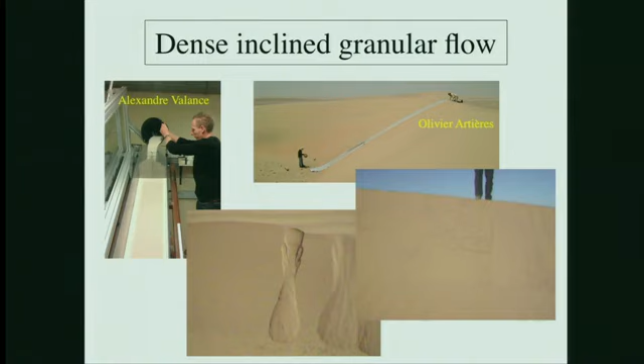So here's a typical avalanche face. This one has been created by somebody stomping, and you could see, of course, the grains going down. And here's a more spontaneous kind of avalanche that occurs on the downwind side of a dune. So there really are a number of dense granular flows that exist in nature and in industry. And one thing that I would say that perhaps will sound controversial is that in many cases we've been simplifying the problem to systems that may not necessarily be of either natural or industrial relevance. Nonetheless, a lot of progress has been made.

And in order to set up the problem, I will start simple. Many of the systems that have been looked at were of a steady and fully developed nature, fully developed meaning that they no longer depend upon x, the direction of the flow, and they no longer depend on time, which of course simplifies the equations. The convection terms in the equation, the inertia, disappear, and we're left with a simple force balance. So if one looks at the stress tensor in the direction of the flow and looks at the shear stress S and the normal stress perpendicular to the surfaces of the direction of flow, one defines a pressure, a granular pressure N.

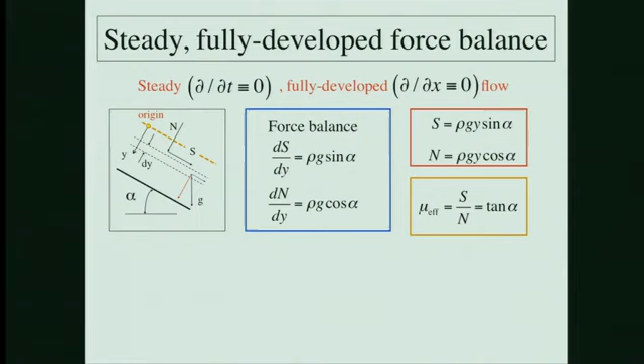In this case, this is general. It doesn't depend upon the constitutive laws. For instance, you recognize here what every scuba diver experiences when going down a swimming pool. The pressure goes up with depth. Similarly, a force balance of this kind occurs in the tangential direction. And when one integrates that equation based on the boundary condition, which is well known, which is the surface, where the shear stress and the normal stress both are zero at the free surface, then one comes up with this, which immediately indicates that the effective friction, which is the ratio of the shear to the normal stress, exerted at every level of that flow is constant and equal to the tangent of the angle of inclination, which means that experimentally we have the capability of setting up the effective friction at a given value and therefore look at how the system reacts in order to adopt that effective friction under SFD conditions, steady fully developed.

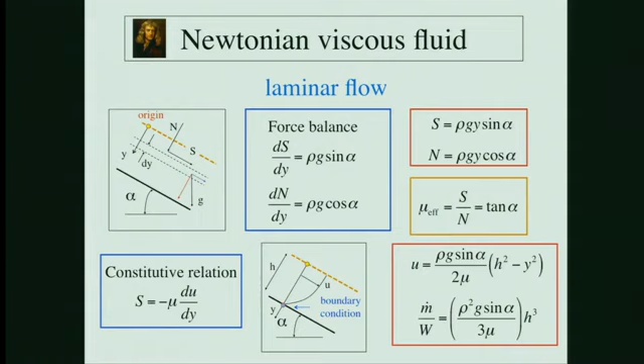So then when one puts in a constitutive law, for instance, for a Newtonian viscous fluid, this well-known constitutive relation, then one can integrate this subject to a boundary condition of a zero velocity at the base, and then arrive at a quadratic profile for velocity, and therefore integrate that again to come up with a mass flow rate that depends on the cube of the flow height. So that's a simple calculation that you could give to any undergraduate.

If you choose another constitutive law for the fluid, in this case, you imagine this is a turbulent fluid where the inertia of the fluid is paramount, then in that case, the shear stress at the base, which again has this form in general, upon integration of the equation that you saw in the previous slide, you then say that the shear velocity U star is typically 5% of the bulk velocity in the flow.

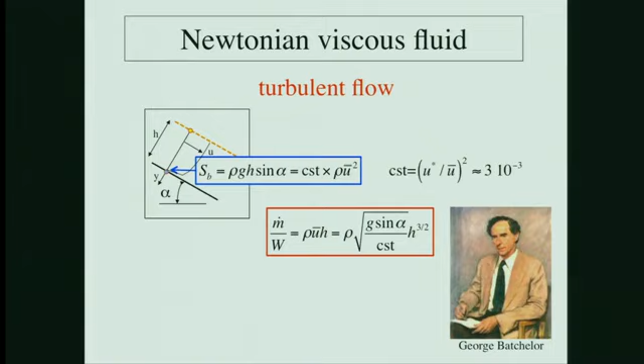Then when one comes up with this constant, one integrates the whole thing to a mass flow rate that now depends upon the 3/2 power of the height. So what about granular flows? Olivier Pouliquen, obviously here in the audience, came up with a seminal piece of work.

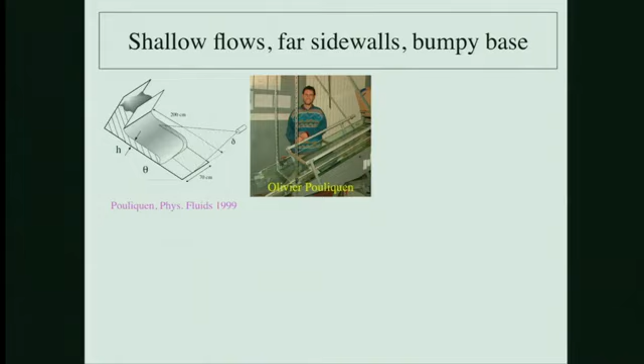In this case, he took some grains that he flowed down a chute that was prepared at the base with a rough, bumpy, as it's called, boundary, and published this very important paper in 1999. So this is a picture I took of Olivier in his lab, and I'm happy to see that he hasn't changed.

What Olivier found out was that the flow could not exist at every angle. There was a minimum angle at which the flow would start, which is around 20 degrees, say, and then there were, well, no measurements, but when the angle is too large, then the steady fully developed condition can no longer be satisfied. And some people here in the audience have worked on accelerated flows that have very different character. But what Olivier found, which was rather remarkable at the time, was that there was this function h stop that indicates that the flow cannot exist at any height at a given angle. If it's below that height, then the flow stops.

Olivier pointed out that the dimensionless number that governs the flow, that makes the mean velocity dimensionless, could be constructed with the shear stress, rather the normal stress at the base, which of course is also given in terms of the height. And then he plotted the Froude number as a function of h over h stop. That collapsed all the curves. All the angles would collapse on a single curve, which he found to be the straight line. So he found a Froude number proportional to h over h stop, which when integrated for the mass flow rate would then provide a 5/2 power of the height, in contrast with what we just saw for the other cases.

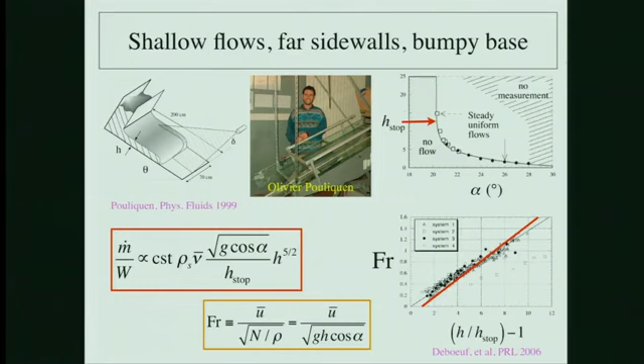Now, some people later, Deboeuf and co-workers, argued that in fact it wasn't so much h over h stop, it should have been h over h stop minus 1, but I suppose it may be in the eyes of the beholder. I would say that Olivier's data was better fitted by the other expression, but that's perfectly fine. The distinction is not perhaps all that important, although you will see in a moment in another flow where that distinction is important.

Well, so this flow over bumpy boundaries became the hallmark, if you like, a rather generic flow that everybody wanted to explain. And I think it's fair to say, although as I mentioned earlier, I have not worked in this field for a little while, I think it's fair to say there are still mysteries in that flow. But let's take a look at what Leo Silbert came up with in numerical simulations of large-scale systems in that flow, albeit with sidewalls that were pretty close.

Some people, particularly in Rennes, have since made the sidewalls farther apart and realized that there are such things as recirculating flows inside that the simulations of Leo Silbert didn't have, because the boundaries were periodic in the direction perpendicular, in the third direction, so the rolls could not arise. Nonetheless, most of the physics that was observed in experiments was also found in the simulations. So if this is a bumpy boundary, the flow existed only in the range of angles.

Crucially, what really excited people was that the volume fraction in the core, in what I call the core of the flow, which was far enough from the bottom boundary as not to be influenced by the bottom boundary, and far enough from the free surface so as to be away from the region where you basically have a very dilute gas, granular gas. In that core, the volume fraction was roughly constant to an arbitrary precision, if you like, that was determined by the simulation or perhaps the experiment.

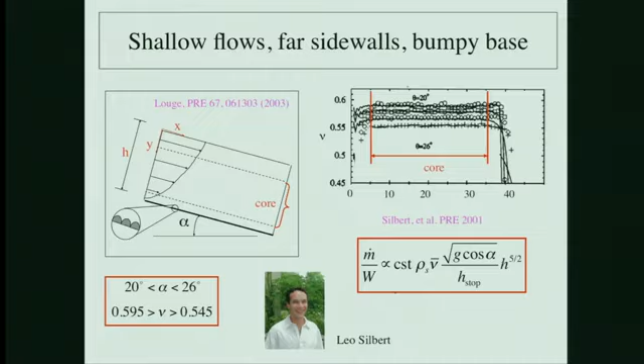So, of course, Leo Silbert confirmed that dependence of the mean velocity that Pouliquen had come up with, and again confirmed that it was as h to the 5/2 power of the mass flow rate. So a lot of people then said, well, let's try and model this. And of course, a great candidate for that modeling was to take a look at the kinetic theory of dense gases. Ogawa had years ago come up with the concept of a granular temperature, which resembles the temperature of an ordinary gas.

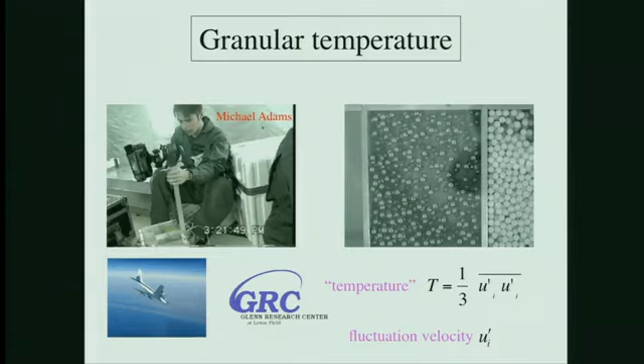So this is called a free float. And you've got a camera looking at these boxes, and these are two of the boxes we were just testing, seeing whether electrostatics would affect one of our microgravity experiments. And so this just illustrates the concept of a granular temperature.

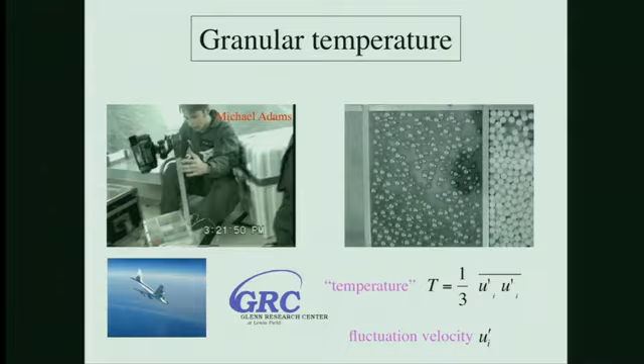So in turbulence, you would call it K, except K would basically be 3/2 of the trace of the velocity fluctuation second-order moment tensor. So it's like the temperature in an ordinary gas. And then Jim Jenkins and Stuart Savage came up with some formal calculations, through a series of papers, of the transport coefficients that the temperature endows to this fluid.

In particular, there's a viscosity, which, like an ordinary gas, depends on the square root of the temperature. There's a conductivity of this pseudo-energy, if you like. And then, unlike in an ordinary gas, there's a volumetric dissipation rate that can be calculated that goes as the 3/2 power of the temperature. Just like when you write the K-epsilon model in turbulence, you have terms in the equation of dissipation that go as K to the 3/2. They have exactly the same origin.

And then, of course, there's an equation of state, the PV equals nRT of dense gases, yet modified for the fact that these particles are much more densely packed, and therefore these functions, F1, F2, F3, F4, are dependent on the volume fraction of solids and the pair distribution function. There's also an entire field of endeavor that looks at the form of the pair distribution function as a function of volume fraction.

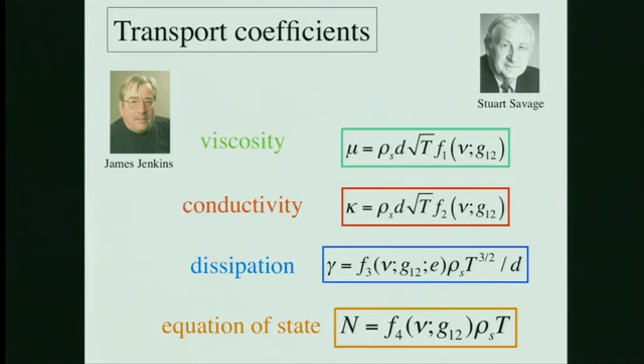And of course, as one goes closer to the glass transition, to jamming, these pair distribution functions do diverge in different ways. There's hysteresis involved. So it can become rather complicated when it's dense. It's much easier when it's dilute, although there are, of course, challenges such as anisotropies and so forth. But when one goes close to the dense packing, there are effects that are undoubtedly important in dense granular flows, and it's not altogether clear what even the pair distribution function at contact with the boundary or among the particles looks like. People like Torquato, for instance, have been very famous in trying to look at these issues.

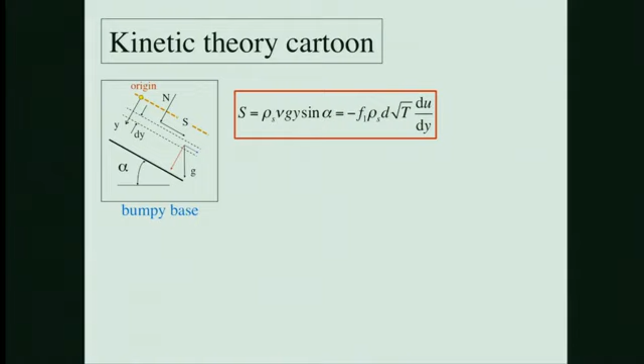Okay, so in having the transport coefficients, what I would call a kinetic theory cartoon can be put together. So it goes like this. It's a similar kind of reasoning as what I showed you earlier for a Newtonian fluid. This equation here is really independent of the constitutive law that one could adopt. In this case, the constitutive law looks like this transport coefficient that has inside this viscosity with the granular temperature in there. So one has to solve for the granular temperature in order to close the problem, similar to solving for K in turbulence in order to close the problem.

So in this particular case, it's nice in a flow like this because the normal stress is known as a result of the integration that I showed you earlier, and because it is related through the equation of state to the temperature, then one knows what the temperature is, and it roughly goes linearly from the free surface if you exclude what happens at the top boundary and at the bottom. So you can combine the two equations, and then again, if you're willing to assume that there's a no-slip condition at the base, which may or may not be true, because after all, a granular medium does not necessarily indulge you in having a no-slip velocity at the base. Sometimes it has to be calculated from the boundary conditions in ways that Jim Jenkins actually worked out.

Can I take questions during the talk? Yeah. Great, please. Why do you assume the temperature is constant throughout the flow? It's not constant. It goes roughly linearly with depth. So you wouldn't want to necessarily have a dynamics to that as well? Oh, there is. And in fact, I'll talk about that in a moment.

Thank you. Yes, of course.

So the temperature, if you like, grows as y, if you assume this cartoon. Okay? Yeah, thank you. So this integration, once you combine these two equations, leads to what people have called the Bagnold profile, in homage to Ralph Bagnold, very well known in fluid mechanics at Cambridge. Lots of Cambridge folks have had their hands on this problem.

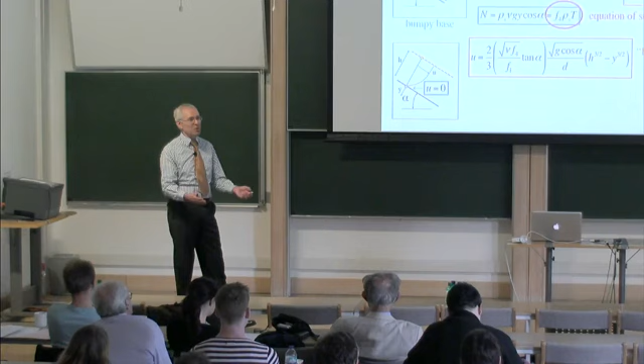It's called the Bagnold profile because Bagnold was the first to realize that one could solve a conundrum by assuming that there was a fluctuation velocity in the granular medium, and therefore the singularity at, for instance, the symmetry axis of a pipe flow could be lifted. So in his name, it's now called the Bagnold profile, although Bagnold, to my knowledge, did not work on this.

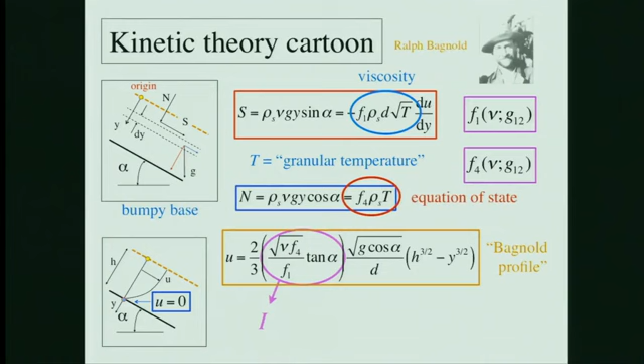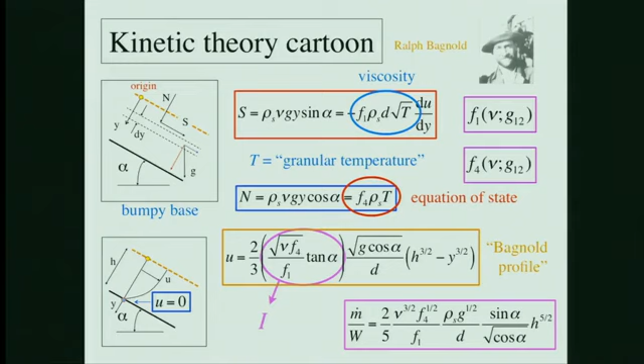One interesting combination is in a number that is called I, and I'll talk about that in the next slide, that appears naturally in the relation of the velocity to the spatial profile. Again, it can be integrated, and lo and behold, one comes up with a 5/2 power of the height.

Okay, so the inertial number that was proposed by François Chevoir, Olivier Pouliquen, and others shown here is a way to relate the effective friction, that is the ratio of shear to normal stress if the flow is steady, in terms of that inertial number, sometimes called the Savage number or the Bagnold number or the inertial number. What they proposed was something that sounded quite natural, that the effective friction would be related to this number, and it has been a very insightful and useful way for people who have flows of practical interest in industry, in particular, to come up with an answer.

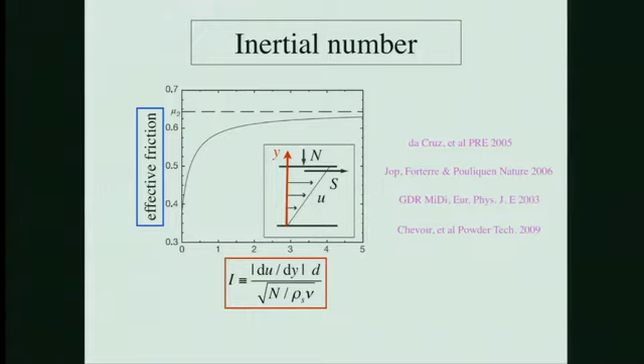It's really not that trivial to work on granular media. One cannot wait for all the theories to be closed and all the dots to be put on the i's and so forth in order to solve this.

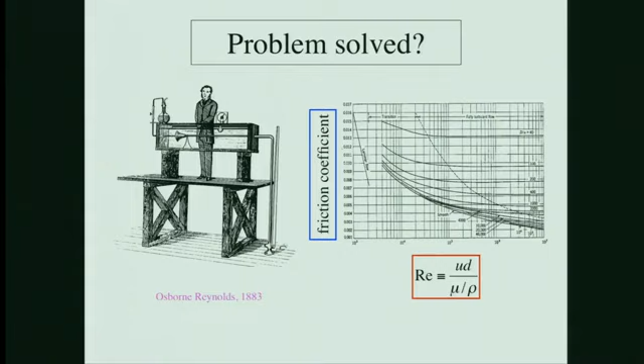Okay, so is the problem solved? And I'm happy to report that, for the sake of our employment, the problem is probably not solved. But if the problem had been solved, it would have resembled what happened after Osborne Reynolds did his famous experiments on pipes to show the transition to turbulence. At the time, people could have said, oh, everything in fluid mechanics is now solved. All we need to do is to define the Reynolds number, and here's the friction coefficient that really resembles this S over N effective friction. And we could just empirically come up with the relation for this and be done. And yes, some people, of course, use those graphs and that's how they do their calculations.

So now I would like to talk about a number of issues that I think deserve a little bit of attention. I will begin, rather simply, by pointing out that flows can have very different concavities of the velocity profile versus depth. This is something which, surprisingly to this audience, because we pretty much all know this, but I've seen practitioners use an approach which was inherently designed for flows of a concavity of a 3/2 power that I showed, use it for flows that have a completely different concavity and in fact a completely different physics. So it's important to point out.

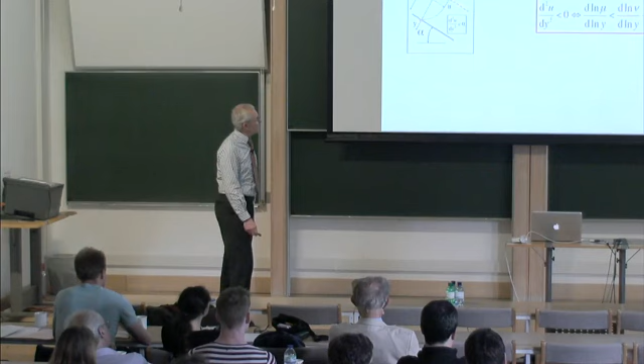So going back to a viscosity, which in the case of a granular medium is no longer a constant like it is in a Newtonian fluid, one can very simply show from this equation, which is correct in steady fluid flow no matter what, that it can be differentiated with respect to the distance from the free surface. And here's this grouping. It's really nothing to write home about, but if the concavity is negative, which is typical of the Bagnold profile, negative because y starts at the free surface, where it's most natural to start the origin of coordinates, not at the bottom, then it's a necessary and sufficient condition to have this relation among the logarithmic differential of the viscosity and the logarithmic differential of the volume fraction.

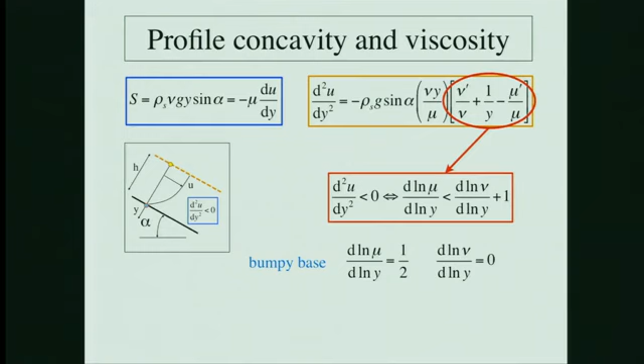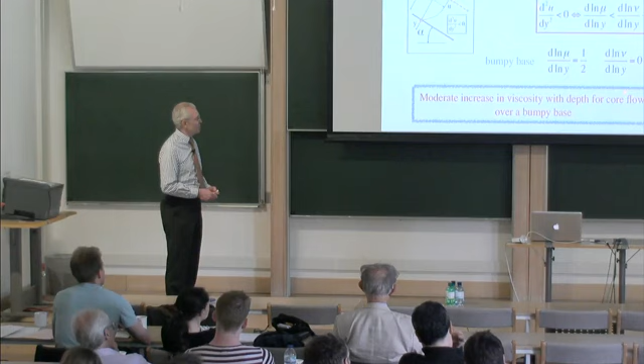So for a bumpy base, what is it? Well, the logarithmic dependence of the viscosity is exactly 1/2 in the Bagnold profile, and the volume fraction is a constant. So in a bumpy base, basically what we have is a rather moderate increase in viscosity with depth, and it is in the case of what are called so-called core flows.

So that's what is relevant for the so-called Bagnold profile. However, there are plenty of other flows, and in fact, one may argue that in geophysics, for instance, these other flows are way more important than the flows over a hard boundary. And one may also argue, and there's some experimental evidence for this, that as a flow becomes very deep over a bumpy base, then instead of having a Froude number that rises with the height, actually it becomes a constant Froude number.

There's a bit of an asymptotic effect there, in which the Froude number then becomes constant, and I'll talk about a regime where the Froude number becomes a constant. So it could be that in most flows of geophysical interest, such as dense flow avalanches and such, it is very rare to see a flow that behaves with a 3/2 power of the height. And here's an example.

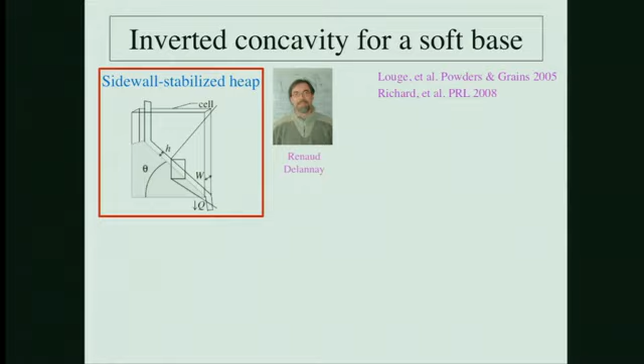Renaud Delannay and his co-workers in Rennes, many of them are here, were quite surprised to see that if you confine a flow within two sidewalls, then the sidewalls will participate in holding the flow, if you like. And as a result, one obtains, as long as it's dynamic, as long as the flow keeps going, then the flow can achieve inclinations that would not be expected, that greatly exceed the angle of repose of a heap. And they call that the superstable heap, or also known as the sidewall stabilized heap.

So this angle theta, actually I called it alpha elsewhere, but forgive me. This angle can be much greater than the angle of repose, but there are sidewalls that hold the flow. And these are simulations by Nicolas Taberlet, who's also here. And clearly the concavity of the velocity profile is very different. It's almost linear near the free surface, and then it decays asymptotically very, very slowly.

In fact, so slowly that there have been some measurements using diffusing wave spectroscopy that were capable of measuring extremely small displacements of the velocity of the grains deep in the pile. And it turns out that nobody has seen the bottom of this. In other words, there's always some micro rearrangement deep enough in the pile, and you could go on and on and on. And there's a remarkable measurement that was done in Rennes where there were, if I can remember how many, something like 6 orders of magnitude, 6 decades of velocity resolution, from the free surface all the way down, and they could not see the end. So clearly this profile does not have a zero slip, strictly speaking.

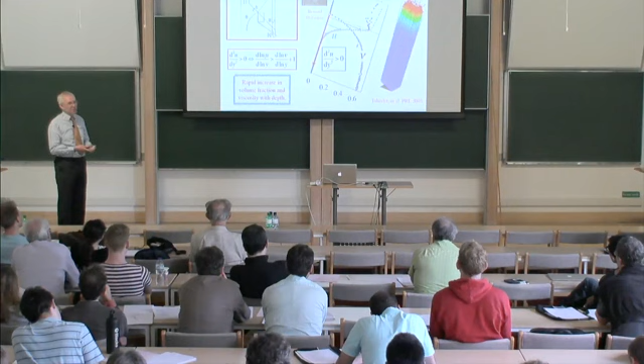And in this case, in the scheme of things, in the equation that I showed you earlier, the inequality, if you ignore the sidewalls, and forgive me for this, but I'll show you a flow in a moment that does not really have sidewalls that has the same character. But if you were to ignore the sidewalls, which of course are an important aspect of the momentum balance, you would show that that concavity means that, particularly if the volume fraction increases dramatically from the free surface, then the viscosity has to increase even more dramatically. So no longer than 1/2, but it has to be way larger than 1 in order to be consistent. So a rapid increase in the volume fraction with depth.

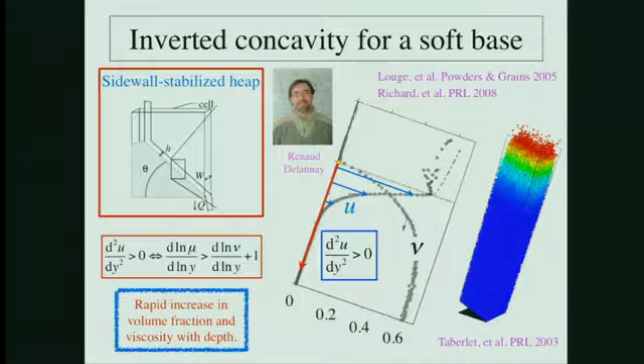So it is rather impossible, one can say, to fit a shoe that's, let's say, a size 5 into a foot of size 10. That is, none of the Bagnold-like flows that we talked about has anything to do with this, not too surprisingly. Okay, so you might say, well, what about the sidewalls? Well, the sidewalls are not necessary in order to have a concavity of that nature, and Alexandre Valance and I recently in Rennes a few months ago did a very simple experiment that was the prelude of the experiment we wanted to do in the desert with the geotextile system, where we measured strain in the avalanche of a sand dune as a function of depth and time and over several days.

And in this case, we just put the same geotextile, used a lot in the civil engineering industry. We laid it down on the base of the chute, and it sort of resembled the Daerr and Douady experiment on felt, that was done at the time, that was relevant to what happened at the avalanche face of a dune, where there's a propagation of waves either going up or going down.

But in this case, we want to have a similar system, except fully developed and steady, and where the sidewalls were no longer as important as they were in the sidewall stabilized heap. And so we just tried that, and it turns out that the sidewalls played very little role, as evidenced from measurements of the flow from the free surface. So now what you have is a base that is very soft and very dissipative of the granular temperature and the fluctuation kinetic energy.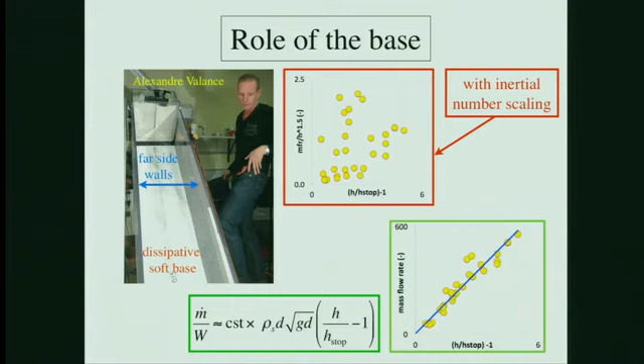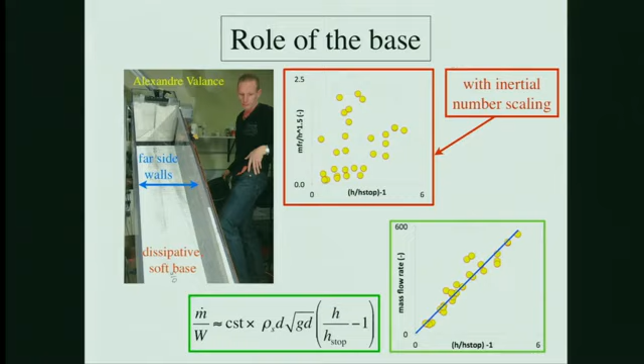All right. So if there was any need to bolster the statement that I made earlier on the irrelevance of the scaling of the mass flow rates to the height to the 3/2 power versus h over h stop minus 1, one could just look at that curve, and if you take the same data points, you can see that it works a lot better. And so in this case, the mass flow rate is proportional to the flowing height, which is h minus h stop over h stop here, directly to the 1 power, as opposed to the other exponents that we talked about earlier. And the relevant length scale being the particle diameter in this case.

Now you remember the case of the sidewall stabilized heap, the length scale that was relevant was not the diameter, but the width of the flow. And so here's some experiments that we did at Cornell on a similar sidewall stabilized heap with help from our Rennes colleagues. And so this is the tangent of the angle of inclination as a function of a height over the width ratio. This is what they found over different ratios of the width over the particle diameter, spanning a fairly large range from 4.5 to 22.

So those are collapsed reasonably well to this expression that simply tells you that the effective friction, or the tangent of the angle of inclination, is some sort of a minimum number plus the contribution of the friction from the sidewalls that holds the flow down. Of course, as the height goes up, that contribution of the sidewalls goes up and therefore is capable of having a much steeper flow. Yes, please.

Sorry. You started by describing the velocity u as a function only of distance y, which was depth from the surface. But now you put in sidewalls, does not the normal coordinate play a part? Of course, it plays an important part. Yes, this is also average. Excellent question. Thank you for asking. This is averaged over the width in this case. Yes, totally wonderful. This is basically a control volume with the entire width.

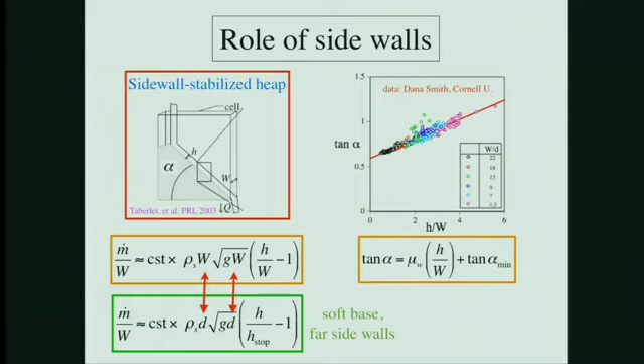Okay, so all right, but the point is that the mass flow rate now is the first power of that flowing height, as opposed to the other exponents that we talked about earlier. Okay, let's talk now about the flat frictional base. That's something that is of great industrial relevance.

I don't think I've seen any chutes that have a bumpy base in industry. They don't want to slow down their chutes. They want to make the chutes go as fast as possible. And obviously on a flat base, it's sort of intuitive it should go faster. So these are simulations by Nicolas Taberlet, again, that I showed earlier some of his other simulations. So this is a bumpy base and a flat frictional base.

This is the velocity colored. Okay, and so here's the profile on the bumpy base, the profile we talked about earlier, the Bagnolian profile. On a flat base, it is clearly much greater, as everybody in industry knows. But what's rather interesting is if you translate the velocity profile in the bumpy base, you will see that in the core, what I call the core of the flow on the flat frictional base, it is totally parallel, which means that there really is a Bagnolian profile over the flat frictional base, but it is above the boundary. And really what happens is that there's a large slip at the bottom of the flat frictional base that really is what characterizes the flow.

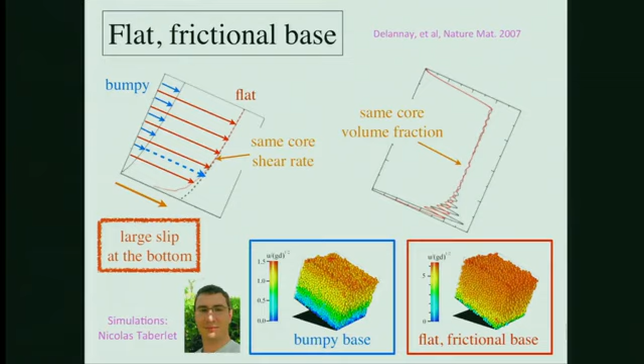And that large slip is what will determine eventually the mass flow rate, and one could even ignore the fact that there's a Bagnolian profile above while you do the integration. It is the large slip that dominates the mass flow rate and not the Bagnolian integration. Again, there is also a core, and the volume fraction Nicolas Taberlet showed is the same as the one over the bumpy base. There also is a core, and it rejoins the same volume fraction. So the flows are cousins, if you like, but one is much faster than the other.

Okay, so here's another kinetic theory cartoon on that flow in the flat frictional base. So similarly, one can calculate the granular temperature at the base. So now focus your attention on the subscript 0, which indicates that now we're looking at what happens in the basal layer, which governs the slip and which in turn governs the mass flow rate. So it adopts a certain volume fraction, nu0, and a certain temperature. The temperature, you can come up with from the same combination of equation of state and an integration down to the bottom boundary, then the same kind of calculation of the shear stress can now be related to the gradient of the velocity at the base, which now becomes, roughly speaking, if you simplify the Bagnolian profile to being a constant velocity, and you just say that the velocity gradient is over a very thin basal layer, you then have an estimate of that gradient.

And I need a little bit of water, otherwise my voice can go up. Sorry. Okay.

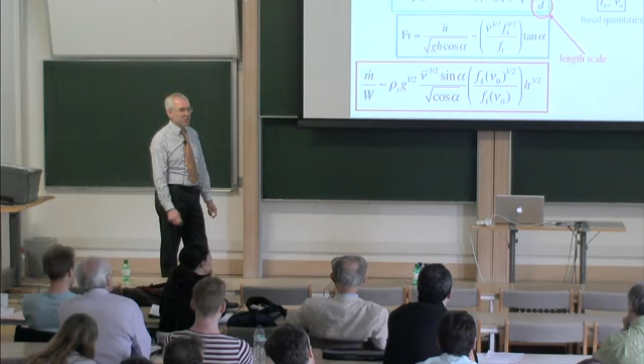Okay, the reason for this, really the ultimate reason in the basal flow like that, is that the length scale is no longer the entire depth of the flow. It is now the diameter, which is on the order of the thickness of that layer at the base. What you essentially have, whether you are in a Bagnolian flow and you have a flow that is sheared all the way to the boundary, or this, there is a region right near the base where the flow feels that the base is there, and in solid mechanics, they would call that a localization, essentially a localization of the phenomenon that is only a few grains thick, on the order of 5 to 7 grains, and that's what one observes in the basal region of a Bagnolian profile, and this localization does occur here as well.

Okay, so experiments to boost this up. These are experiments I did with Steve Keast back in the mid to late 1990s. So it tells you how long ago I've been working on this problem. I'm sure you'll straighten me out on all the things that I've missed since then.

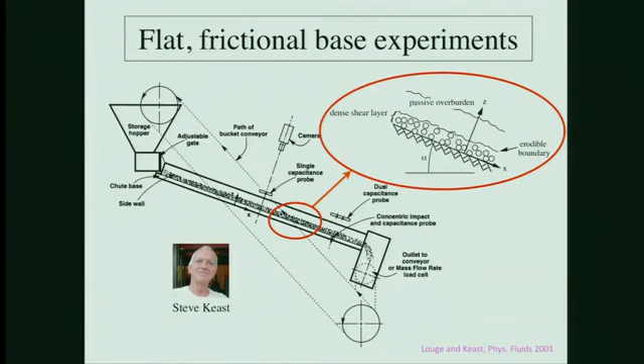So the way to model this simply is to say there's a passive overburden, which is the Bagnold profile, which becomes much less important, so I treat it as a passive overburden. This was an idea that Jim Jenkins mentioned. And some sort of a basal layer that can be modeled.

Now, Roy Jackson was one of the first people to work quite seriously on both the flat frictional and the bumpy boundaries. There's a number of papers that were written. Stuart Savage also did contribute. There's a number of authors. And what Roy Jackson pointed out is that all the flow experiments could be put in a single diagram that shows the mass flow rate in terms of the mass holdup.

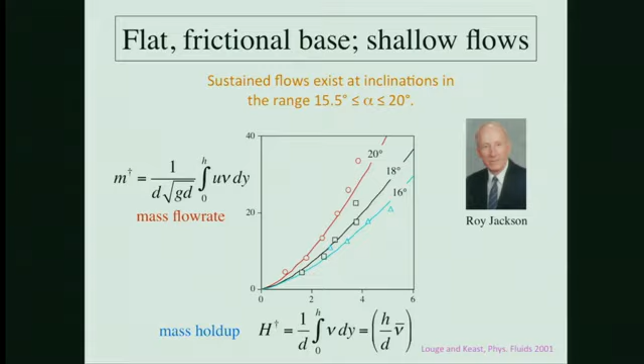So you see the mass flow rate is the integral of the velocity profile times the volume fraction, and the mass holdup goes as the integral of the volume fraction. And so the flows at different angles of inclination and at different heights, these are 16 degrees, different heights, can be represented, and it can be shown that indeed the Froude number is a constant and no longer dependent on the height. Okay, so what is the challenge in flows on a flat frictional wall? It's to predict what happens at the base, and clearly that is not being predicted.

Charlie, you had your hand up. Trying for about 5 minutes. I'm sorry, it's like waiters in a cafe. You can never get their attention.

Sorry. Okay, go ahead. Well, it just occurred to me that you keep talking about the slip layer in terms of granular temperature and kinetic theory. Isn't the simple answer that you've got a rolling layer of particles? Aha, thank you very much. Seen in simulations going back 30 years. Totally, 30 years. Oh yeah, yes. In fact, Charlie understands this very well and is perfect.

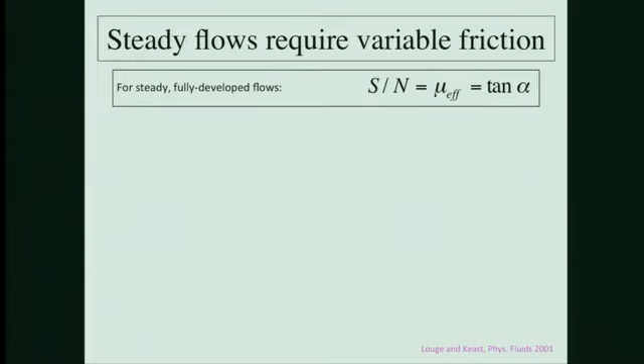That segues into what I'm talking about in this slide. So this is great. Charlie's talking about the rolling layer at the bottom. So this is what this slide is about, to get to. Yes, absolutely. Thank you very much.

So we do have, again, this tangent of alpha, which is the effective friction. And the argument here is that if you ignore the sidewalls, because all forces are exerted at the point of contact of individual grains with that flat wall, geometrically, that's an argument that's a bit incontrovertible, it's right at that point, it means that it is the dynamics of that point that matter.

And here's the conundrum that we have. We took pains at measuring the friction angle of these glass beads that were glued on a piece of metal, and we put it on the chute, and we raised the chute until the tangent of the angle of inclination exceeded that friction, and it started slipping. So that was 0.59, pretty large value.

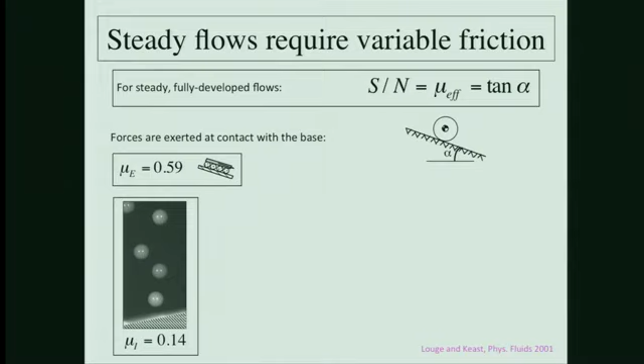And then we had a facility where we studied impact that allowed us to do some impact measurements of either particles colliding in midair or particles colliding with walls. In this case, with the very same particles on the very same surface, we measured 0.14. So two very different values of friction. And it turns out that over the range of inclinations where we observe steady fully developed flows, that range of angle was somewhere between the arctangent of these two numbers. So there was a bit of a smoking gun, if you like. Being in the US, I use that kind of analogy. In that the effective friction was adjusting itself to an angle that was exactly equal to the angle at which the chute was held.

Otis Walton, when we did numerical simulations, had actually seen that conundrum before. He did some numerical simulations and realized for quite a while that if one adopted a single friction, one had to raise that friction to values that were totally unphysical. And why is that? It's because if you have a single friction coefficient at the point of contact, then the ratio of the tangential to the normal force had to be, by Coulomb's law, less or equal to mu, meaning that by the time you integrate all the interactions of all the grains with the bottom wall, you could only have an effective angle of that integration that was less than the friction that you assumed.

So that was a bit of a conundrum. And many simulations have the same conundrum. They use a friction coefficient which is artificially too high, which is completely and thoroughly unphysical. There's no, to my knowledge, impact friction with this kind of experiment here. No simulation ever assumes this. They always assume that.

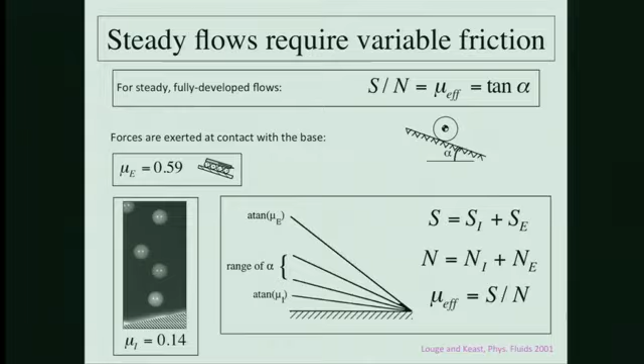Okay, so the point is that the friction probably adjusts itself to the speed, the relative speed of the contact point with the base, and that's well known. Friction is a complicated system. It's a dynamical system. Baumberger and Caroli, for instance, wrote a series of seminal articles on the subject back in the 80s. Friction is not a constant. Everybody who plays the violin knows that there's a regime of stick-slip which gives rise to sound. Steady friction is only a part of that regime. But Ken Johnson, here in Cambridge, has known that for many years.

And if one comes up with a theory that marries an enduring kind of theory a la Jackson, Roy Jackson was the first one who actually put together a tensor, added the two tensors together, one that dealt with enduring forces, more like solid mechanics, together with a tensor that looked more like the kinetic theory of dense gases. You added them up together. It was a bit controversial to do that, but why not? We adopted the same formalism. Stuart Savage also did that. And we calculated formally that the effective friction had to go down with the Froude number, which of course was a conundrum because it led to an unstable flow. There was no way, if you make your friction less if you go faster, then clearly it's conditionally unstable at every point on the curve. Okay, so we had that conundrum, but the rolling layer was the one that let us go above that conundrum.

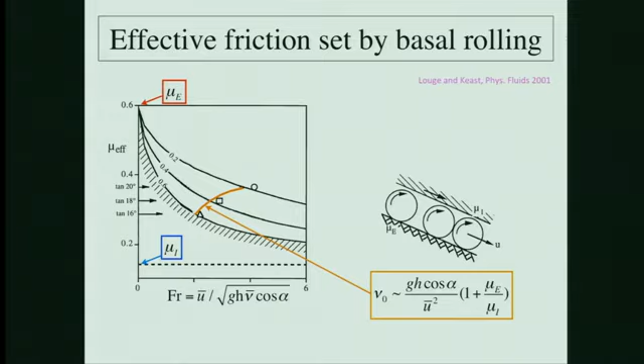Okay, so let's talk a little bit about fluctuation energy, because I think people here will straighten me out. I know there has been a lot of progress since I last looked at the problem. So you will see the depth of my ignorance.

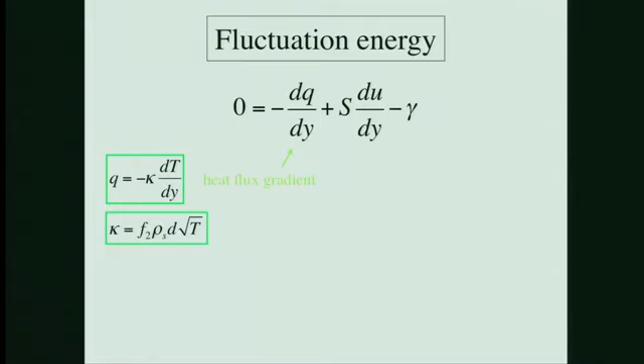But the fluctuation energy in steady fully developed flow, the balance looks like this. The first two terms are what you would see in an ordinary fluid where the Eckert number is non-zero, that is to say where the working of the shear through the stress tensor, rather through the velocity gradients, contributes to the heat transfer flux. The difference here is that we now have a dissipation per unit volume. So here's the heat flux gradient that has to do with this conductivity I talked about. Here's the flux, which looks like a Fourier flux. Here's the work rate of the shearing, and here is the dissipation.

And okay, so here, what is the conundrum? Well, the conundrum is that if you just assume that you have kinetic theory, and if you make the distance from the free surface dimensionless with the grain diameter, n goes roughly as proportional to y, so does s. The temperature also is proportional to y. The things I talked about earlier. And then if you put all the equations together from what I showed earlier, you get this monster thing that only involves these functions of volume fraction here.

And so if you take the problem in this direction, if the volume fraction is a constant in the core, and there's no term of the flux gradient, which Kumaran showed was negligible in the core because the conduction length was very small, right? Then you could say, okay, if you transform this equation to this one, but here's the conundrum. This term here is a function of the volume fraction. So if indeed the equality here, so here are the terms identified, if dq/dy is zero, then it follows that you cannot have nu equals constant because it has to depend on y, which is still in this equation.

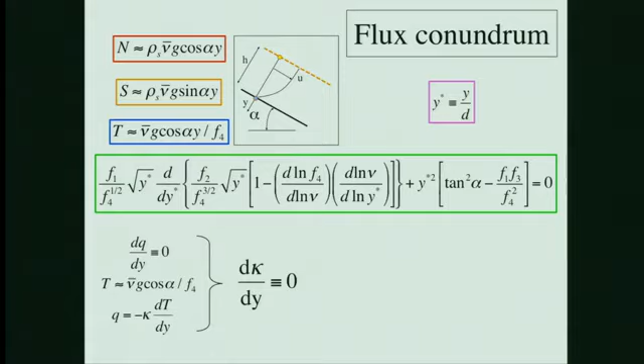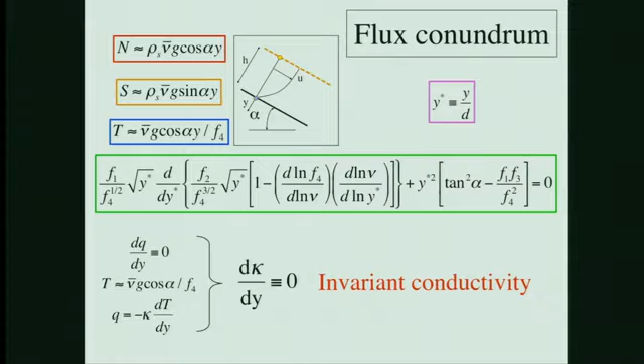So if you go back the other way, you say, oh, well, if dq/dy is 0 and T goes like this and q has to have this form, then it follows that the conductivity has to be invariant. Trouble is, it's not an invariant in the kinetic theory because it depends on the square root of T, which itself depends on the square root of y, and therefore it's not working. Okay, so the conductivity, strictly speaking, mathematically, this is a mathematical institute, right? So I could say that. Strictly speaking, the conductivity must be invariant for the kinetic theory to apply.

Okay. All right. So this was done a while ago. I know that there have been some developments that Kumaran, I'm sure, will tell us about.

But at the time, I bothered to take the myriad of papers that were written on the subject, and I've forgotten a few, Bocquet and PRL and so forth, and I dissected each and every one of them and I put it on MATLAB or Mathematica and integrated the equations, and I wanted to see what they predicted. This was an honest attempt at looking at what was going on.

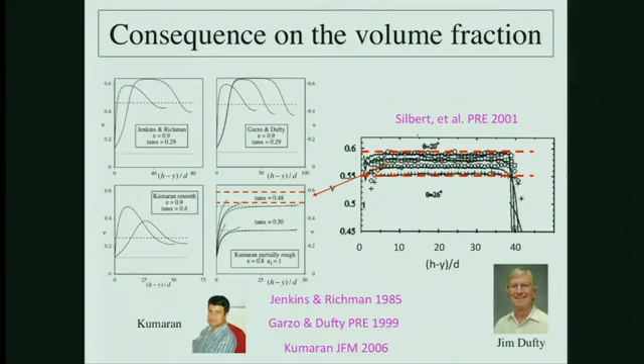Kumaran was the winner of that contest at the time, and I spent time at KITP. We spent several weeks together arguing. It was great. We shared the house. It was absolutely wonderful. It's another of these scientific paradises that you have here. And anyway, Kumaran was the closest with this partially rough theory.

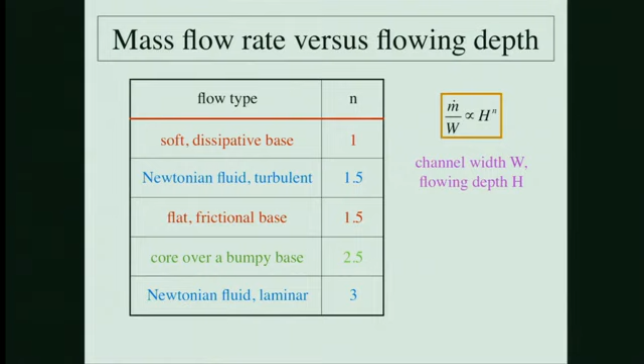So the Froude number, if you like, is a constant in both cases, which is well known to people who do hydraulics. The core over a bumpy base is 2.5, the so-called Bagnold flow, and if this is a Newtonian fluid, laminar, which of course hardly ever happens in flows of interest, it's as high as 3. So these exponents really are an integrated system. It's an integral, so it's difficult to argue with it.

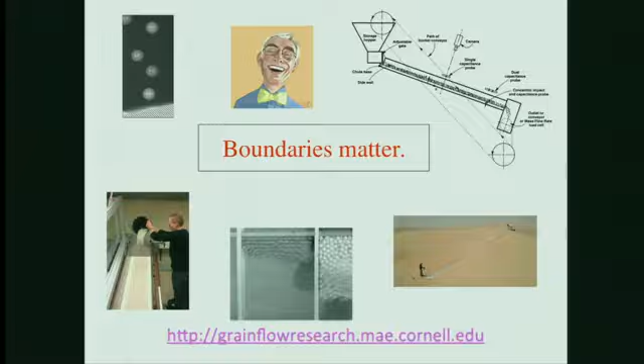Sure, there must be some questions.

I have two questions actually. The first one is, what is the plural of the word conundrum? Is it conundra? I think so, yes. I remember my Latin, that's right, yes. Templum, templa.

The second question is, I would like to model, perhaps because I'm an engineer, the granular flows on a substrate with two ingredients. On the one hand, a constitutive law for the bulk flow. On the other hand, a boundary layer law, involving perhaps a few grains, or a few granular layers. Would you agree with this, and do you think you can cast the various observations into that framework? Well, I will interpret that as a useful comment rather than a question.

I would say definitely yes. There are approaches where we have to use the Saint-Venant theory, we have to use the boundary layer theory. We can't avoid it. So similarly, we have a question, but I don't know in what order. At the back.

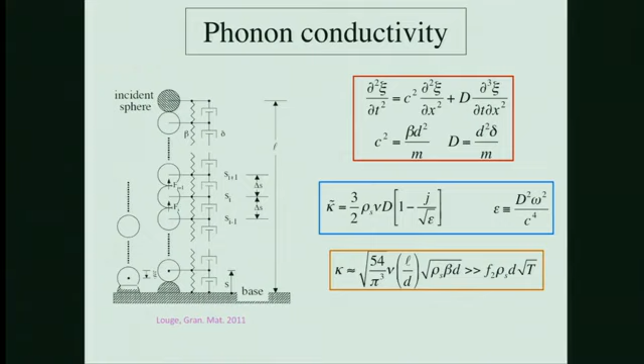I will defer the questions on the kinetic theory to people who really know something about it. I've been a user of the result, engineering-like, and there are people in the audience who are much more knowledgeable on that. I think Michel's being very modest.

I'm afraid we don't have any time for any more questions. We have another speaker, except I have one question: does Olivier still have that jumper? The jumper, the picture that Michel put up, was exactly the jumper. I think Jim was after it. That was our next speaker. So, round of applause.